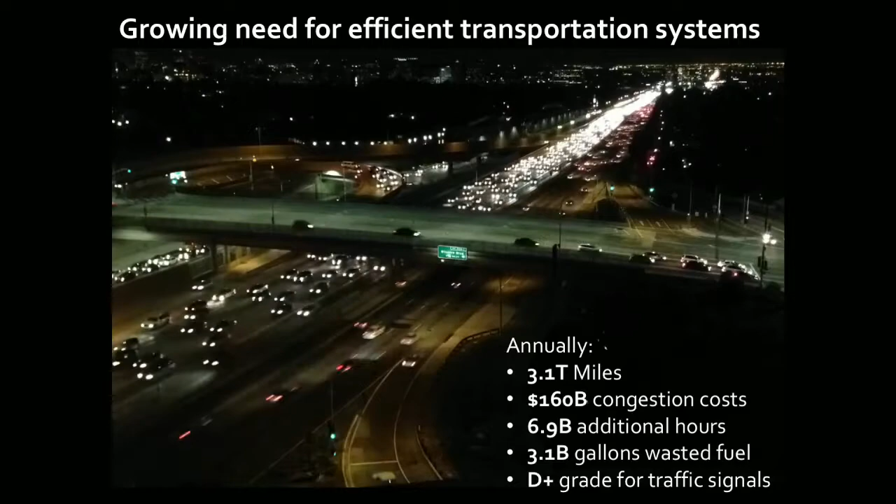So the purpose of this video and some of these stats is to show that this is a huge problem, even on this small picture, understanding how traffic is flowing around in this picture, and if you want to ask yourself, what can I do to improve this situation? How can I control this network better? I think it's apparent that there's a lot of different problems you have to reason about along the way. So there's a growing need for efficient transportation systems.

So the good news, I would say, on the flip side of some of these negative statistics and this apparently daunting task, is that even though traffic flow is a very old problem, there's a lot of new opportunities that allow us to bring new tools and new ideas to this domain. And so here I've highlighted what I consider to be the three major thrusts that give us these new opportunities.

The first is that we have real-time wireless sensing all over the transportation infrastructure. So we see that with cars themselves acting as probe sensors in the network. We see this with actual wireless sensors embedded in traffic infrastructure in roads themselves.

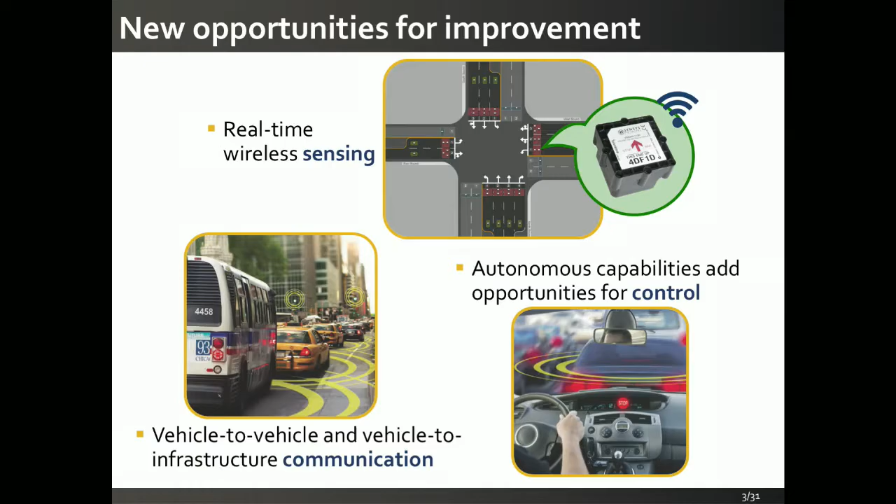Increasingly, we're seeing vehicle-to-vehicle and vehicle-to-infrastructure communication capabilities. So not only are we sensing this, but we're able to communicate, which gives us the ability to close the loop around these sensors. And these DSRC radios that you may have read about are becoming more common on commercial vehicles, and in theory, they'll be on every commercial vehicle within the next few years or so. Unclear if that's really going to happen, but certainly the technology is moving in that direction.

And then, of course, the hottest topic today in the media is this idea that we're going to have new autonomous capabilities in these cars, which add an entirely new dimension to the control paradigm here. So we're going to have cars that are able to do some things on their own, certainly, and then, depending on how optimistic you are, can end up doing a lot of things on their own in the very near future. So all of these are going to present new opportunities and also new challenges for controlling these complex systems. So another side to this problem is that this is going to bring us a ton of data.

In fact, probably an overwhelming amount of data. Like so many systems in the real world these days, this amount of data is going to quickly become very difficult to deal with. And so I think here the challenge is that we need to understand how to best make use of this high resolution streaming data that we have from vehicles and infrastructure.

And then maybe in addition, and I'll talk a little bit about this towards the end, we also want to understand how this data and this information should tie into other societal scale systems that are going to interact with this, what you might call a smart city scale, right? So this is now a buzzword as well, this idea that you have these interacting smart infrastructure pieces in this large smart cities context.

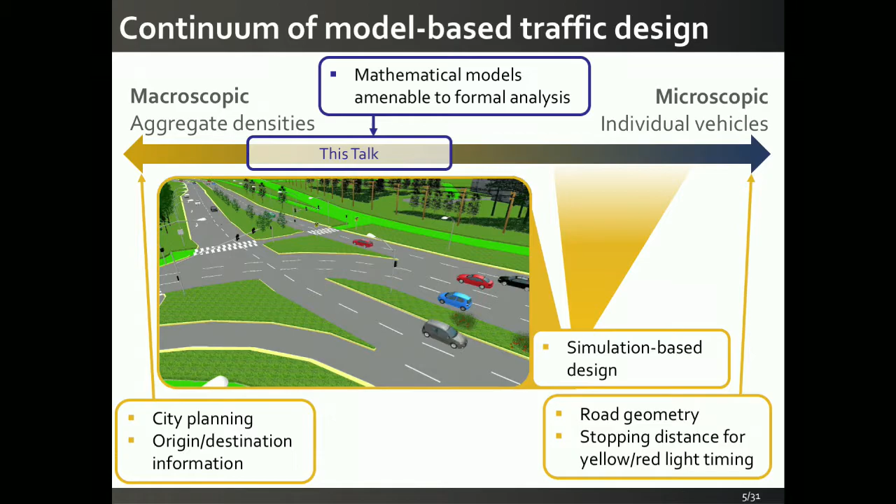I think this is an underexplored area that's ripe for bringing data to the picture and understanding the mathematical structure in these problems. And so what we're going to be after today are mathematical models that are going to be amenable to some sort of formal analysis so that we can say something concrete about the system without having to resort necessarily to these simulation models. Of course, it'll be nice to validate them in perhaps a more detailed model at the simulation level.

But I'm going to argue that there's a lot of benefit to be had by looking at models at this piece of the spectrum. So that's where we're going to lie today throughout this talk, models that are closer on the macroscopic side of things. So think understanding densities on links of networks, understanding queue lengths and how queue lengths through a network change over time. These sorts of scales is what we're going to be looking at.

I'm going to present a meta model for traffic flow that is very flexible in the sense that it can accommodate a lot of specific instantiations of however your traffic in your particular city behaves, but it's useful for modeling this wide class of problems. And then in the second part of the talk, I'm going to argue that we've identified a sufficiently simple model. It's broad in the sense that it can accommodate a lot of scenarios, but it's simple enough that we can actually identify mathematical structure in the problem. And I'm going to pull out a particular piece of structure that I'm going to call mixed monotonicity. We'll see that it's an important dynamical property of these models, and we can do some interesting analysis with this property.

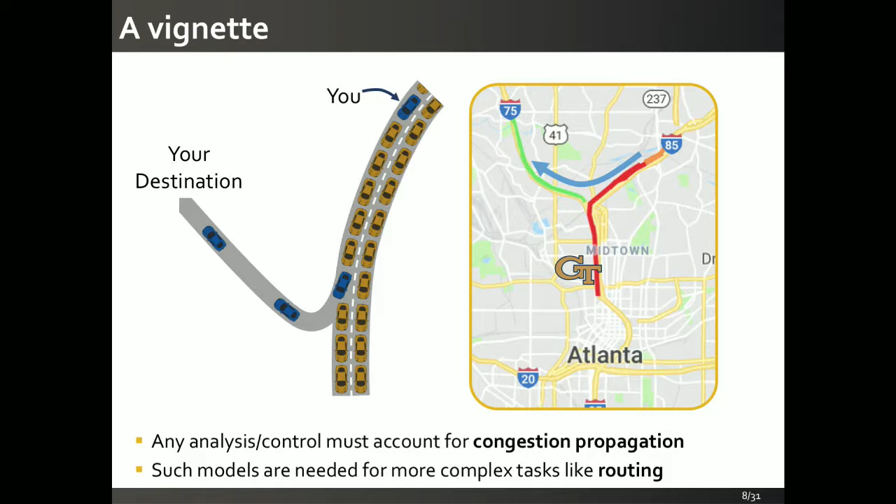OK, so with this kind of intuition in mind, let's make this problem a little bit more mathematically concrete. These next few slides will be the most mathematically dense part of the talk, I would say. OK, so let's say we're after a meta model of traffic flow. We want to be able to model traffic, say, on a freeway network, but we want to be able to capture the types of phenomena I just described, these congestion effects in traffic flow. So I'm going to suggest, as many people have done in the traffic flow literature, that we track the evolution of traffic density over time.

And we're going to spatially compartmentalize our traffic network so that we get some sort of network of links like this. And what we're going to do is track the density, or say the number of vehicles on every link in this network, right? And we want to be able to track them over time, on the scale of minutes or hours. Okay? So we want to see, for example, that if you get a congestion downstream, eventually you'll get congestion on this link, et cetera, and that will cause this congestion issue that we just described on the previous slide.

So we'll call this entire collection of links script L, and we'll say that the vector x denotes your densities on your links over time. So let's take a look at an isolated link in this network. Let's say your link L, and we want to write down the dynamics for the density on link L. So this is x sub L dot, the change in density for vehicles on this link. The equations come from, again, a physical property of traffic flow. They're going to come from conservation of mass equations.

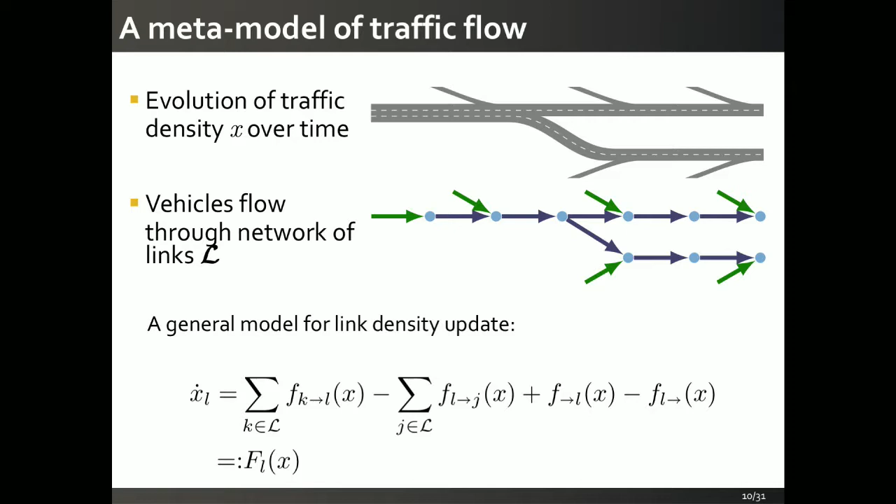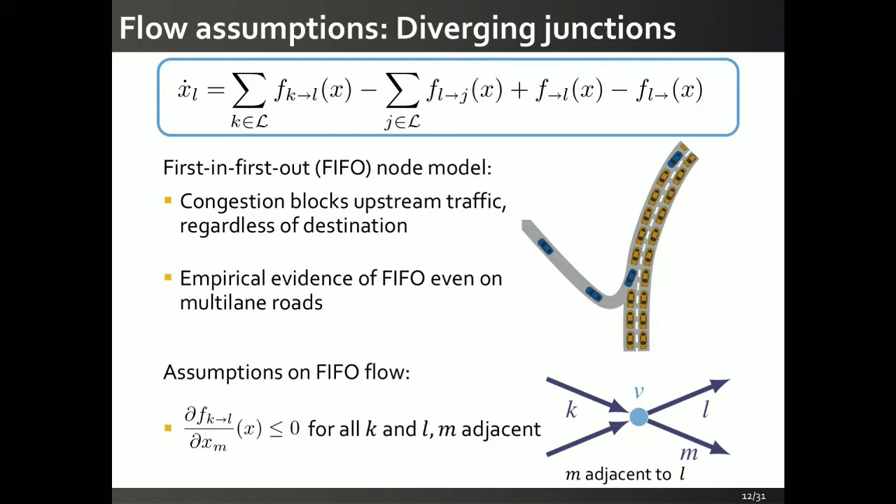So these are the assumptions: if you give me a traffic flow model and you populate these flow functions with whatever you want to choose, so long as they satisfy these general flow properties, I would argue this is a reasonable meta model of traffic flow. OK, so let's spend at least one slide making this a bit more concrete.

So let's take a look at this particular situation I've been alluding to. You have one road that splits into two roads, right? This is our vignette. You have an upstream link 1 that splits to two downstream links 2 and 3. This is something we're adopting from the standard literature on traffic flow modeling. It's this idea that traffic links can be modeled as having demand and supply functions, and the flow at the interface between two links is a function of these demand and supply functions. So let me explain what I mean by that.

Every link has a demand function d sub i that's an increasing function in the state of that link, so increasing in the density of that link. And this function represents the volume of vehicles that are wanting to flow downstream, right? So you have more cars on a link, there are more cars trying to get downstream on that link. This is the demand function of that link. It's an increasing function.

Symmetrically, every link has a supply function. This is the supply of available space on that link, and it's decreasing in density, right? So when there are no cars present and x sub i is 0, the supply function is as large as it can be. And then as this density increases and approaches some jam density, the maximum capacity of a link, this supply function decreases. So as you have more cars, you have less space for vehicles on that link.

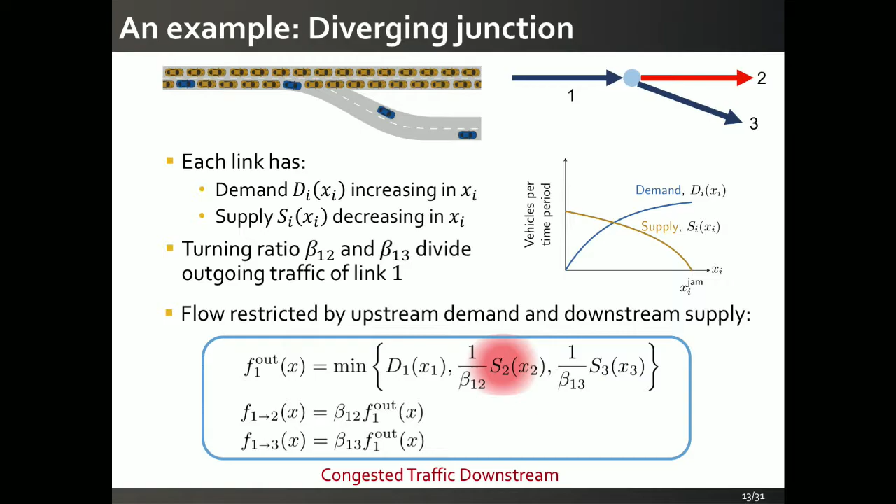On the other hand, and this is probably the condition that we're more interested in capturing, what happens when the supply becomes constrained downstream? What happens when you have congestion on a link downstream? So for example, in particular on link 2, then this becomes the minimizer in this expression, and link 2 becomes the driving force behind this outgoing flow of link 1. Okay, so here's an example. Again, this is a specific example of an instantiation of our meta model for traffic flow. Okay.

Okay, great. So that concludes the first part of the talk. We now have a mathematical meta model in our pockets for traffic flow. What can we do with that? So in the next part of this talk, I'm going to argue that this meta model we've constructed with these assumptions on flow that we've pointed out has a lot of structure in it. It has an interesting structural property called mixed monotonicity.

And this property, mixed monotonicity, we can actually use to say general statements about traffic flow networks that satisfy these meta model properties. And as I've argued, I think these are the types of models you would want for traffic flow networks. OK, so I need to do a little bit of dynamical systems background here.

So suppose you have a system that looks like this. X dot equals f of x. So this is an ordinary differential equation. It defines a dynamical system, a continuous time dynamical system, right? This is a definition up here. This system is said to be monotone if the following property holds.

If you take 2 initial conditions, x at time 0 and y at time 0, and again, x and y are vectors. And so when I say x at time 0 is less than y at time 0, I mean that each element is less than or equal to the element on the other side, right? So if x is a vector of densities and y is a vector of densities, x and y are ordered if each of these densities satisfies this inequality.

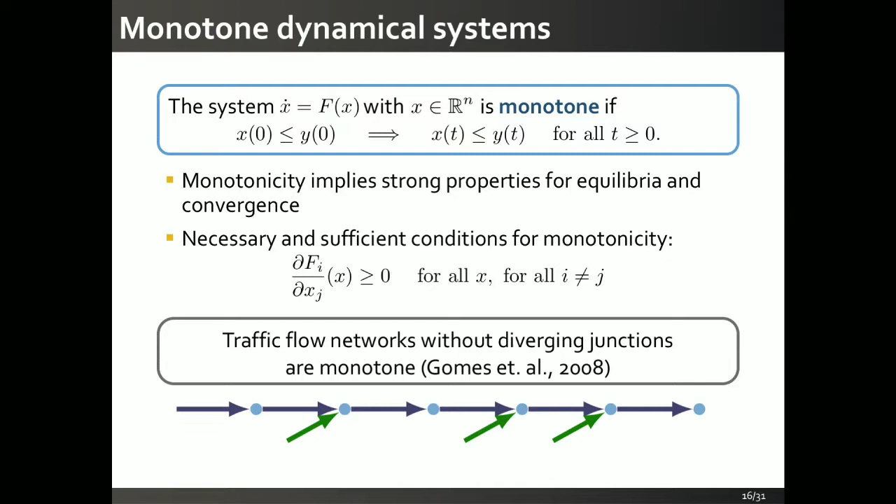So maybe just a linear segment, a freeway with some on-ramps. This would satisfy this property that doesn't have diverging junctions, and the dynamics on this system are monotone. Okay, so that's an interesting observation. It's been known now for about a decade, as I said. So the question is, what can you do when you don't satisfy this property, when you have diverging junctions? And again, this is what we're interested in studying. We want to be able to say something about this vignette we opened with, about how traffic behaves in that scenario.

So let me move to this slide. So what we've done in our work is we've introduced a new concept of mixed monotone systems. So we didn't introduce the idea of mixed monotonicity, but it hadn't really been applied to too many interesting systems before. So what we did is we took this property, we've written it in this form for continuous time systems, and we've shown that we can use it to study traffic flow networks. So let me work through this definition a little bit. It's a little bit more complicated than our definition for monotone systems theory. But again, it's designed to capture a lot of the same features.

OK, so a system x dot equals f of x, again, this is a dynamical system, is mixed monotone if you can find what's known as a decomposition function g, which takes 2 arguments, a vector x and another vector y, and this function g satisfies the following 3 properties. The first is that if I substitute in the same vector x for both of these arguments, I should get back out my original vector field f of x. And this should hold for all x. So this property tells us that this decomposition function captures all of the information of our original system. There's no information loss by looking at this decomposition function.

Then the next 2 properties, let me explain what they are. The first is that if you take the partial derivative of g_i with respect to any element x_j, this should be non-negative for any x and y, and i not equal to j. And the second property is that if I take the derivative of g_i with respect to y_j, this should be non-positive for any pair of vectors x and y, and now for all i and j. Okay?

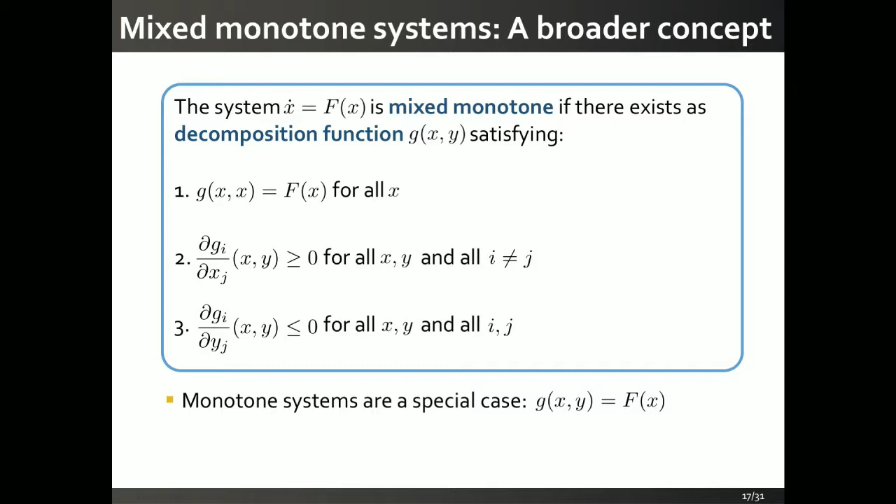And let me just drive home the point that this is an extension of our definition for monotone systems, because in the special case when our system is monotone, we can take our decomposition function to simply be equal to our vector field f of x. And you can see that then this condition doesn't apply. We don't need to worry about this condition, and we recover condition 2, which was exactly this derivative condition I had on the previous slide. Okay? So mixed monotonicity, now a generalization of monotone systems theory.

OK, so let me tell you a sufficient condition for mixed monotonicity. This is actually not a necessary and sufficient condition. So in the monotone systems case, we had a necessary and sufficient condition. Let me now just tell you a sufficient condition for mixed monotonicity. And it's as follows. If you take a look at these partial derivatives, fi with respect to xj, you want to be able to find a delta ij, which is either 1 or -1, so that this product is always non-negative for all x, right?

OK, so this is actually a pretty easy condition to reword. It just means that if you take a look at this partial derivative for any i not equal to j, its sign should not change over your state space, right? It should always either be positive or it should be negative, OK? So again, in the monotone case, we needed this sign to always be positive. But in the mixed monotone case, we can take either positive or negative, all right?

So I'm telling you this is a sufficient condition for mixed monotonicity. So somehow I should be able to connect it to this definition I showed you on the previous slide. And I can do that by constructing explicitly this decomposition function. It's actually pretty straightforward. You just take your vector field f of i, which takes as arguments x sub 1, x sub 2, up to x sub n, say, if your system has n dimensions. Anywhere where I saw x sub j, I take it out, I put y of j, right? I do this for every f of i, then I stack them up. I call this my decomposition function.

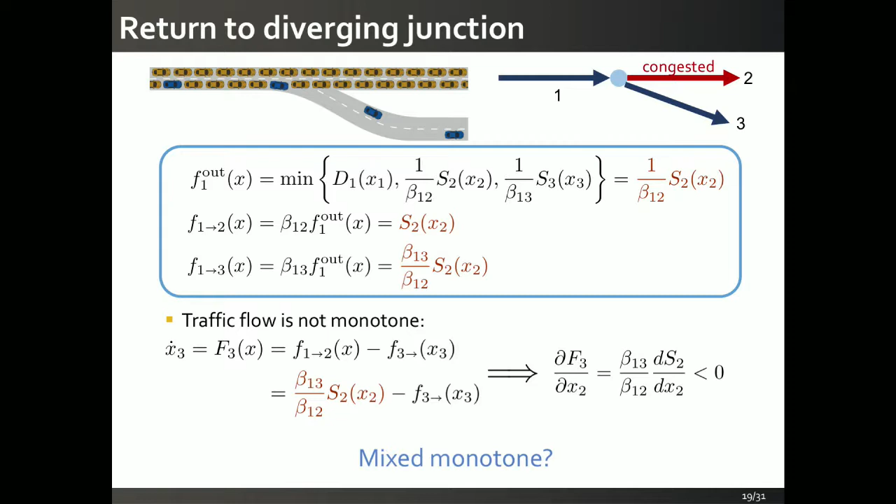So here's the question, is this system mixed monotone? Well, you can probably guess that the answer is going to be yes. Otherwise, I wouldn't have gone through this effort to define mixed monotonicity for you. So let me just write that down as a theorem.

So this is a theorem we proved a couple years ago now, that traffic flow networks have mixed monotone dynamics. So if you don't have any diverging junctions, it's monotone. But even if you have diverging junctions, you at least have this mixed monotonicity property, which generalizes very nicely monotone systems theory and gives you this new tool set at your disposal. I'll skip the proof. The proof is basically using the intuition I described about the sufficient condition for mixed monotonicity.

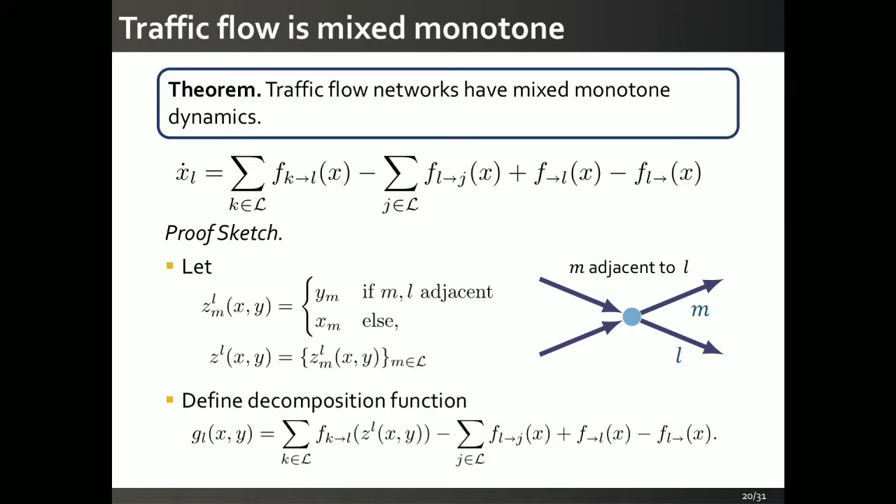OK, that's great. Let me just quickly explain how we can use this property, mixed monotonicity. Now you know that traffic flow is mixed monotone. What can you do with it? Well, here's one thing we've done with it. We've used mixed monotonicity to construct what we call an embedding system. So you just take your decomposition function, you take 2 copies of it, you swap the arguments, and you call this entire system the embedding system. It has twice as many states as your original system, x dot equals f of x.

But it has these interesting properties. The first property is that this embedding system is actually a monotone system. OK, I had to play a couple of tricks. I have to redefine what I mean by a partial order on states, but that's easy. And here's the mathematical expression for that. If you think of regular monotonicity as being with respect to the northeast quadrant, this embedding system is with respect to the southeast quadrant. So I just reorder my y variables. That's straightforward.

So that's important. I now get the power of monotone systems theory I can apply to this embedding system, which I can construct for any mixed monotone system. The other important feature is that on a particular subspace, submanifold of this higher dimensional embedding system, I actually recover my original dynamical system. So if I can say something about this entire embedding system, I can then also apply that to what's happening on this subspace.

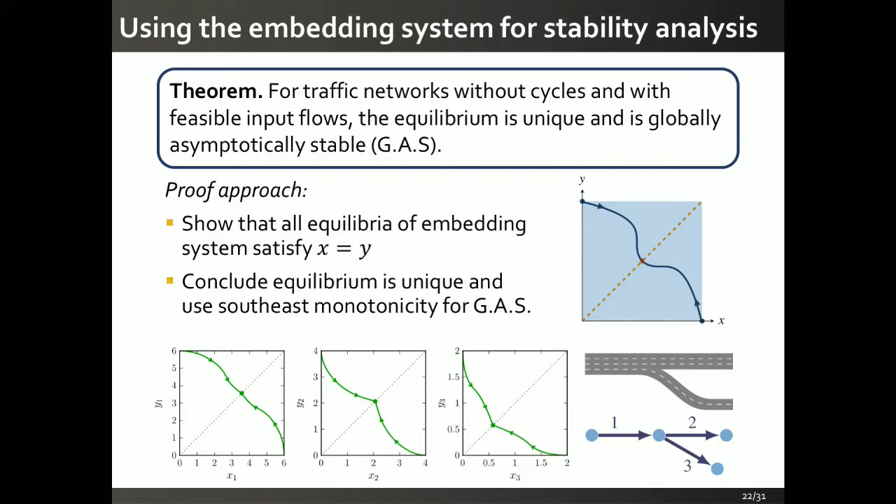And here's just that picture of that happening for, again, our motif example of this diverging junction with some particular numerical results. We see convergence to a unique equilibrium. So that's just a hint at what we can use this mixed monotone property for.

OK, so I want to switch gears now a little bit in the time I have remaining and talk about a slightly different problem. What happens in traffic flow systems when we introduce autonomous vehicles? What should we expect to change about our system dynamics? OK, so we want to introduce autonomy. So I want to make a couple points.

The first is that this is not a futuristic assumption, right? Autonomy is already here. Of course, I'm not talking about fully autonomous cars that can drive you without steering wheels. Those are on their way, and they'll get here someday, maybe. But autonomy in the sense that we already have advanced technology to do lane keeping.

We have adaptive cruise control technology, which I'll talk quite a bit more about in the next few slides. Automatic parking, right? So we have these technologies. You might call them semi-autonomous technologies. These exist. You can buy these tomorrow in many different versions of a car.

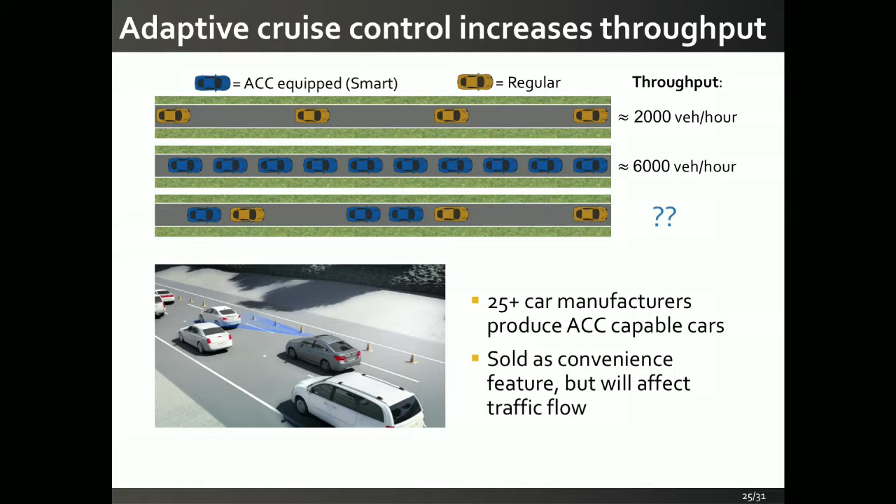But here's the question. What happens when you have mixed autonomy? You have some autonomous cars and some regular cars on the network. What's the answer to this? And again, I just want to highlight, there are 25 plus car manufacturers that produce ACC-capable cars today. So this is a relevant and important question.

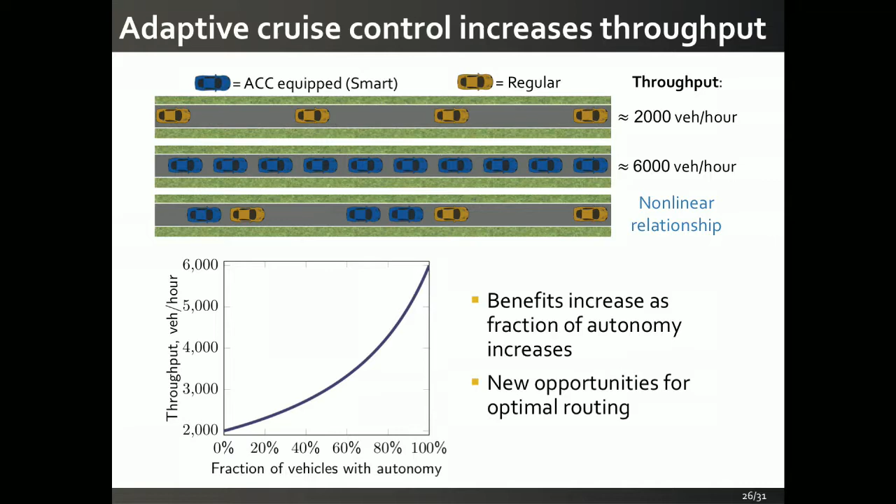The other important observation is that if you could somehow control the number of autonomous vehicles on a road versus the number of regular vehicles on a road, you have these new opportunities to kind of tweak the throughput possible on that link. And that's what we've been studying in these last few slides that I want to cover before wrapping up. So just a few slides on this.

So I want to exploit this partial autonomy for optimal routing. So here's the question: can we realize traffic improvement by actively routing smart versus regular vehicles? Okay. Here's the fundamental property we're trying to trade off. If I can increase the throughput on a link, I can reduce the delay on that link. Okay. This is what we're trying to take advantage of.

And the metric we're going to use to describe how good we're doing is this well-known idea of price of anarchy, which you probably are familiar with in at least some sort of colloquial context. The price of anarchy is the ratio of the worst case delay you could see in a network, say, an entire network of Atlanta, with selfish routing, divided by the best case delay you would see with optimal routing. Okay? This is called the price of anarchy.

Some known facts. The price of anarchy is known to be bounded for traffic flow networks when you only have one type of car, say regular cars. It's known to be bounded by 4/3. This also sort of explains why there's only so much benefit you can expect to see by really doing a smart job routing cars through a network: if you just let them do their own thing, and every car kind of locally optimizes its route, in the worst case, you're only going to make things worse by a factor of 4/3.

Okay, so our question, and this is joint work with some of my collaborators at UC Santa Barbara, is what happens in this partially autonomous case? And it's actually a very interesting story. So let me spend 2 slides talking about this prototypical example. Say you have a source node and a destination node, and you have 2 roads between these 2 nodes. This is kind of standard for these optimal routing problems. You can actually get a lot for the general case by studying this simplified case.

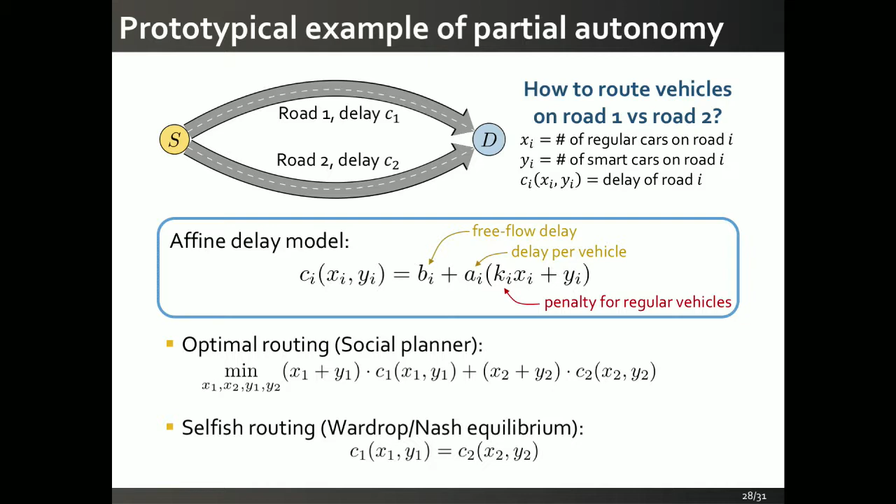And again, if we're talking about the price of anarchy, the optimal router is interested in this quantity here. You want to take the cost on link 1 times the total cars on link 1 plus the cost of link 2 times the total cars on link 2. The selfish routing situation, Wardrop, Nash equilibrium, sort of the same ideas. The cars are just interested in making sure that their costs are the same. I can't do better if I switch to a different road, right? So these are sort of the 2 things we're looking at.

So let me tell you what happens for this simple network with some particular cost function. Let's make, admittedly, particularly simple cost functions, but they're within our class of affine delay functions. So the cost of this top road is free. Well, no, sorry, it has a cost of 1. That's the free flow cost, but it's free for additional vehicles.

I mean, the more cars you put on it, doesn't cost you extra. On this lower link, we'll assume that the cost is just a function of the regular cars, and that somehow smart cars, the cost is free, right? Okay, so again, it's kind of simplified, but it's definitely within our class of systems.

Now suppose you have 1/2 units of smart vehicles, okay? And maybe a unit's 1,000 cars or something like that. You have 1/2 unit of smart cars that you're trying to route between these 2 roads, and you have 1/2 gamma regular cars you're trying to route. And say gamma is some number greater than 2. Okay? What's going to happen in the selfish case?

If these cars are selfish, you can reason about this, and you'll see that in this case, all the cars are going to take this lower road. Okay? So what's the total cost going to be? It's going to be gamma times the number of regular cars, so that's 1 over 2 gamma, times the total cars on that link, and this is the quantity you get.

Okay? Now, what if you were smart? What if you're the social optimizer and you're trying to optimize this cost? What would you do? You would actually split the traffic. You would put all the regular cars on the top, all the smart cars on the bottom. And what delay would you see? You would see something like this. The smart cars don't have to pay anything, and the regular cars pay cost of 1, and you get a cost of 1 over 2 gamma.

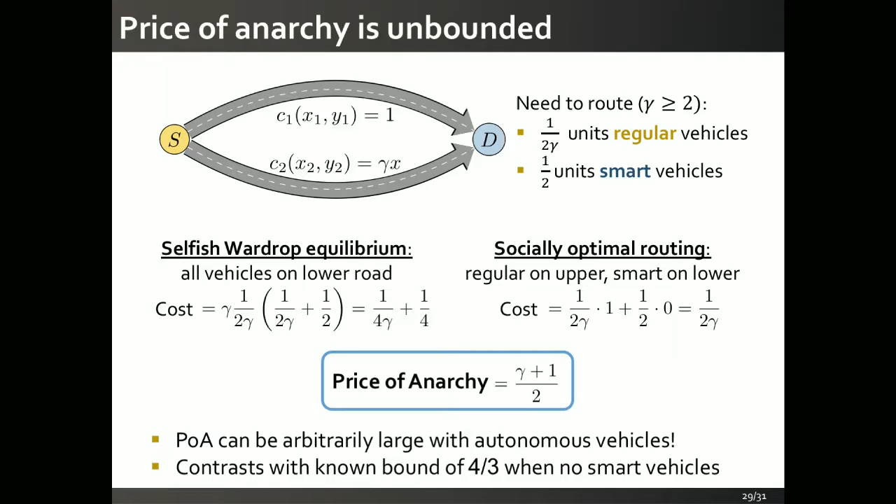Okay? And of course, this contrasts with the known bound of 4/3 when there are no smart vehicles. So this tells us, theoretically, the situation is going to be very different when I have autonomous vehicles in our system. So the good news is that we can provide some bounds on the price of anarchy. So this is recent work. This is a theorem that's going to appear in ACC this summer.

So again, the price of anarchy is going to depend on the extra penalty you have associated with regular cars. So let's take a look again at our affine delay model. This was the affine delay model we had. K sub I was that extra penalty for being a regular car instead of a smart car. If you take a look at an arbitrary network, so the entire city of Atlanta, say, or the entire city of Seattle, and you take a look at this asymmetry, and you can imagine this asymmetry might be a function of the road geometry or how many sensors are on the road, that sort of thing.

And if you let capital K just be this maximum asymmetry in your network, and I want to emphasize that for adaptive cruise control, most people think that this penalty is going to be in the order of 2 or 3, say. If you have an arbitrary network and this maximum penalty is less than 4, then we have shown that the price of anarchy is less than or equal to 4 over 4 minus K. Okay? This is the theorem we have.

So let me highlight a few features of this. First is it recovers this really well-known 4/3 result for the particular case when K equals 1. When K equals 1, there is no penalty for being a regular car. It's just like having one type of car in the network, so we get our classic result.

We also know that it's tight for K equals 2, but we don't know if it's tight in general, and in fact, we don't think it is. We actually think that there probably exists a bound for K larger than 4, but we haven't been able to prove it yet. But we can prove it in this case. The last comment I want to make is that we actually have similar bounds for a quantity known as the bi-criteria, which is a measure of how much extra traffic you can put on the network with this optimal routing.

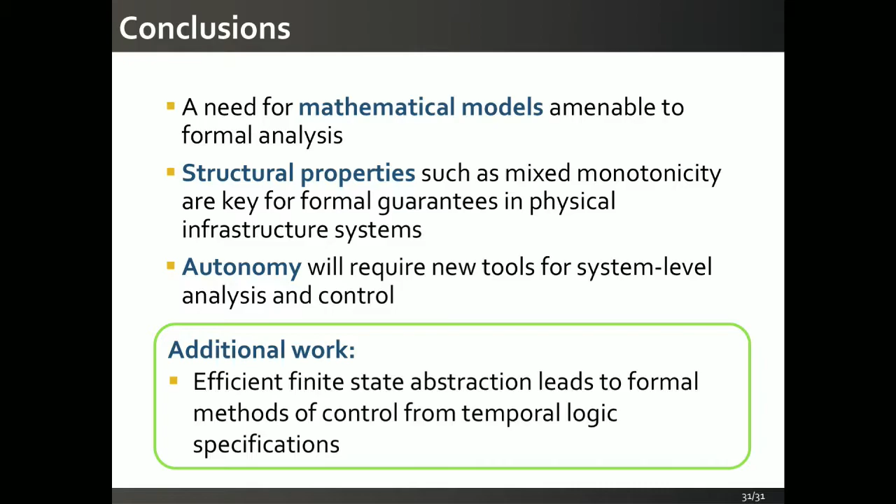I want to highlight something that's not in this talk that's a big part of my research, but I didn't have time to talk about it: I use these formal models and these formal structural properties for formal methods of traffic systems, to apply these formal techniques from computer science, if you're familiar with things like temporal logic, to these systems. And again, these structural properties are key for doing these types of formal techniques on these systems. If you're interested in that, I can talk to you more about that offline.

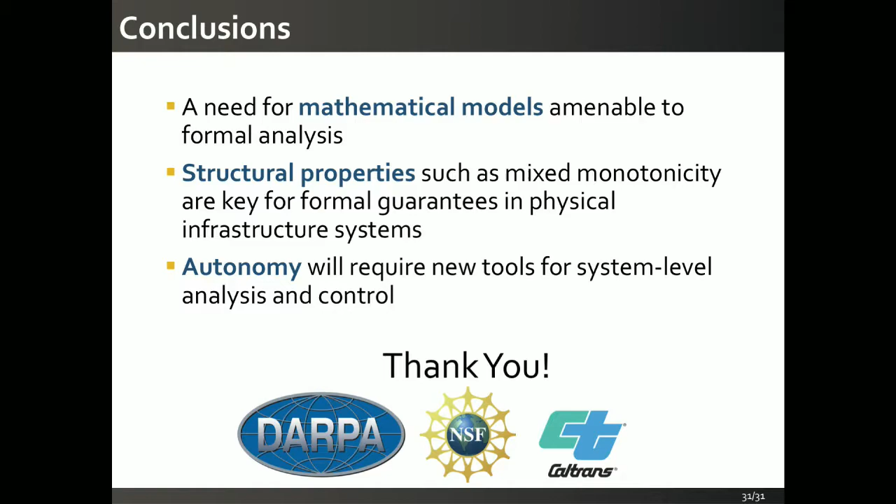So thanks, Sam. Are there any questions? If not, I have a few. So in the part of your talk where you say that you get some guarantees for cases where you don't have cycles in the network, that basically will just apply on freeways and things like that? So it sort of depends. Even if your network has cycles in it, if you assume that, say in the morning rush hour, people tend to go one direction, the topology that exists for that morning rush hour you might be able to model as an acyclic graph, perhaps.

And is there any hope of extending it? Yeah, there is definitely hope. I think there are answers there. Things get much more complicated when there are cycles for many reasons. But yeah, there is some hope there. I think we're going to need more tools in monotonicity, but I think things can be done there.

The other question I have, if no one else has a question. So the last part that you talked about, have you made the connections with some of the recent work in routing games on things like altruism and tolling? Well, tolling's been around for a while, and we even have some recent work interpreting that kind of congestion as a multiplicative uncertainty. And actually, we have an ACC paper with exactly the same price of anarchy bound. Oh, really? Yeah, we're probably in the same session. Some of the stuff we were finding is interesting parallels between different interpretations of the same kind of result. Okay, we should talk about this more offline.